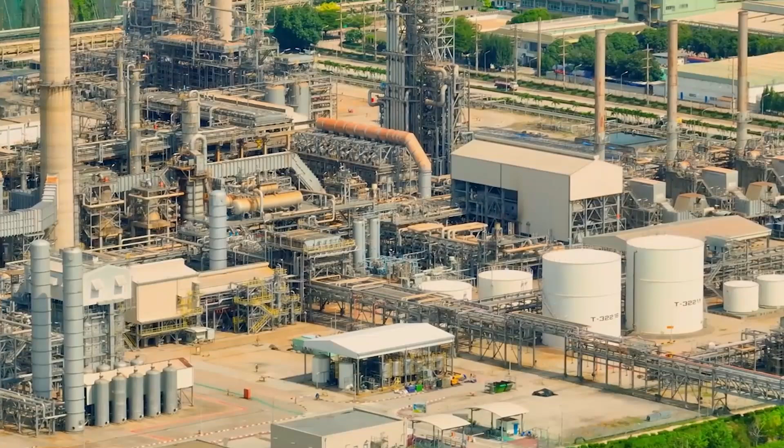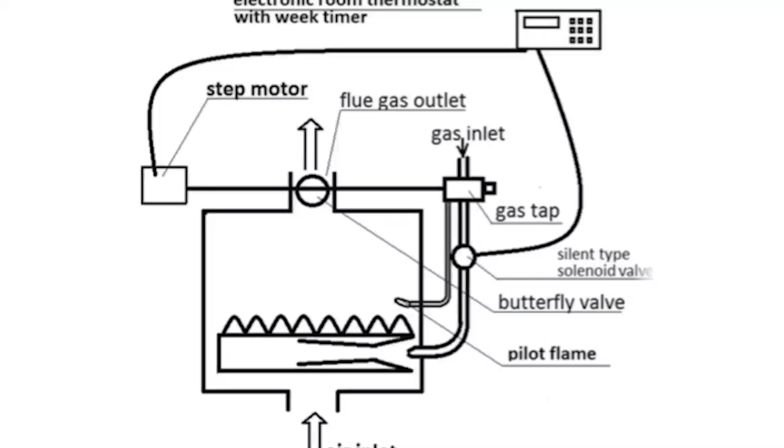And this is not a concept. This is not a prototype sitting in a laboratory waiting for funding. This has already been built thousands of times across thousands of years. In ancient Rome, engineers constructed thermal complexes the size of city blocks, structures that maintained precise interior temperatures using nothing but stone, airflow, and geometry. In the Persian Empire, architects designed buildings that stayed cool in deserts where temperatures exceeded 50 degrees Celsius. In ancient Greece, philosophers mapped the sun's path and oriented entire cities to harvest its energy deliberately.

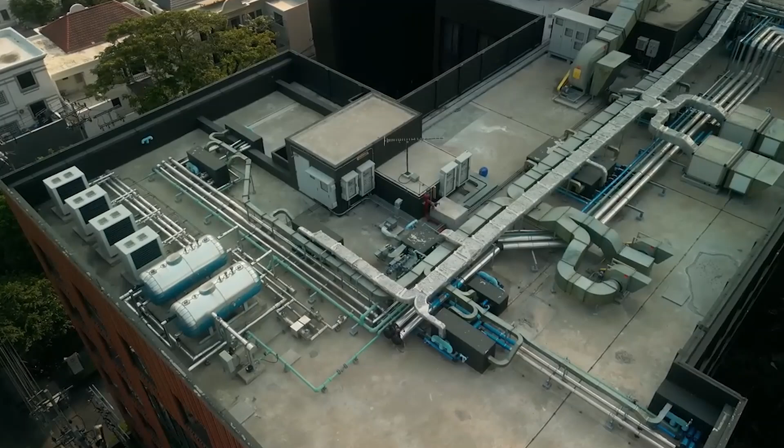Then in 1972, in the deserts of New Mexico, one architect rebuilt these principles from scratch and proved they still work. And yet, today, almost no standard home is built this way. That is not an accident. That is a decision. And behind that decision is a system worth hundreds of billions of dollars that depends entirely on one thing: that your home cannot heat itself.

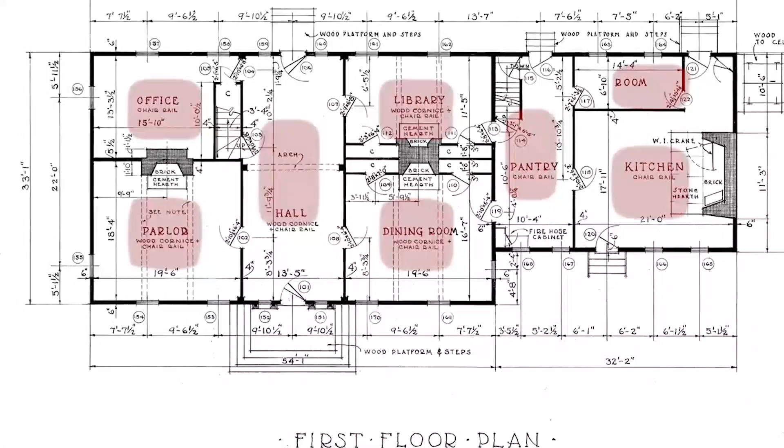This is what they buried, and this is how we dig it back up. Let us begin with what they do not teach in architecture school. Over 2,000 years ago, Roman engineers solved a problem that modern construction pretends is still unsolved.

They called it the hypocaustum, from the Latin meaning heated from below. And what they built was not a primitive fireplace. It was a fully engineered thermal distribution system embedded directly into the bones of a building. Here is how it worked.

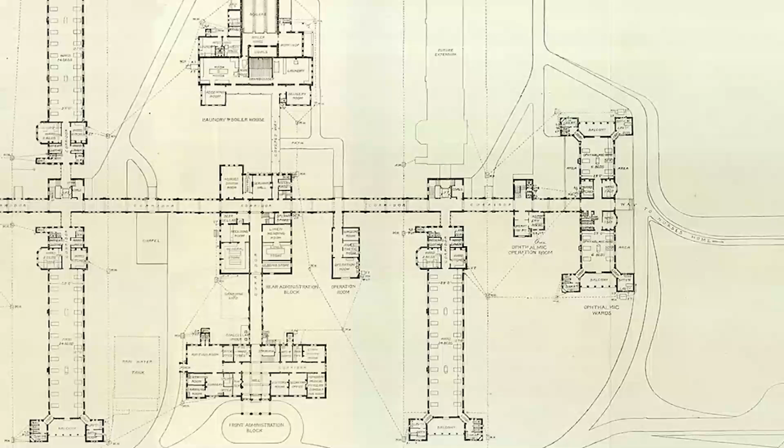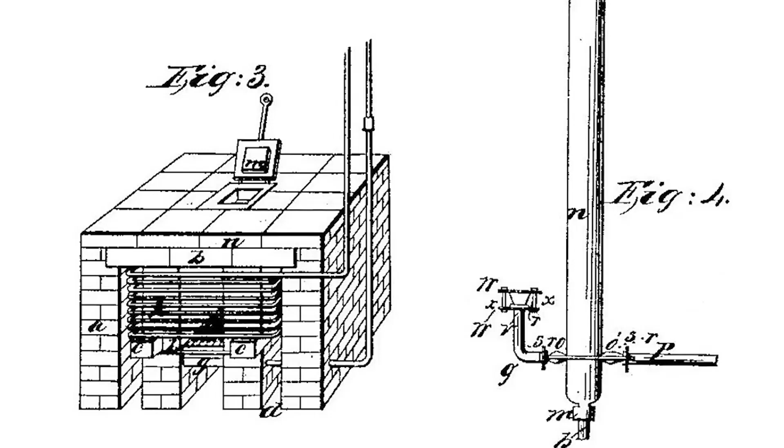The floor was raised on small brick columns called pilae, stacks of fired clay, precisely spaced, creating a hollow chamber beneath every room. A furnace, called a prefurnium, was positioned at the building's edge. Slaves fed it wood, but the fire itself never entered the living space. Instead, hot air traveled horizontally beneath the raised floor, moving through the chamber by convection, the natural tendency of warm air to spread into cooler spaces.

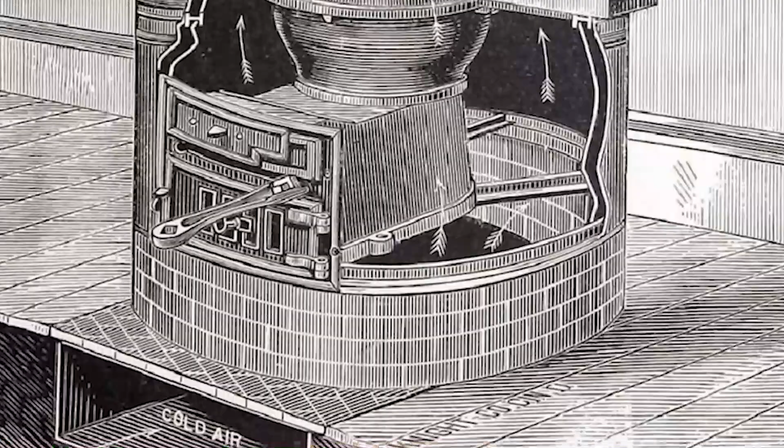It did not stop there. The walls were hollow. Ceramic box tiles called tubuli were built directly into the wall structure, creating vertical channels from floor to ceiling. The heat rose through these channels. The walls themselves became radiators. The entire building, floor, walls, and ceiling, was one unified thermal system.

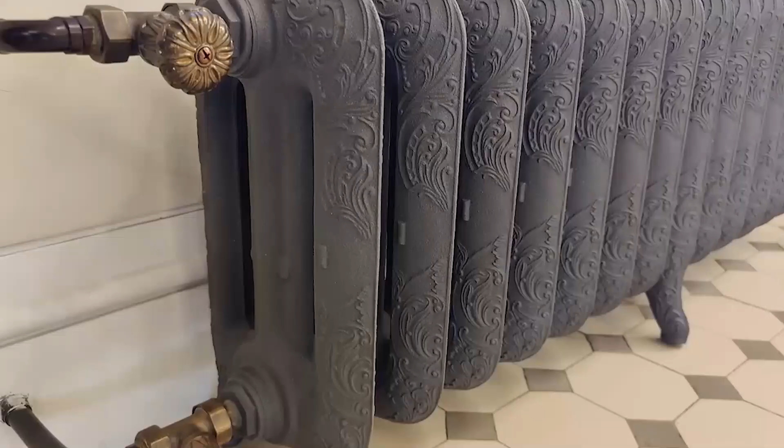The Baths of Caracalla in Rome, completed in 216 AD, used this system to heat a structure covering more than 11 hectares simultaneously, using a handful of furnaces positioned at calculated intervals.

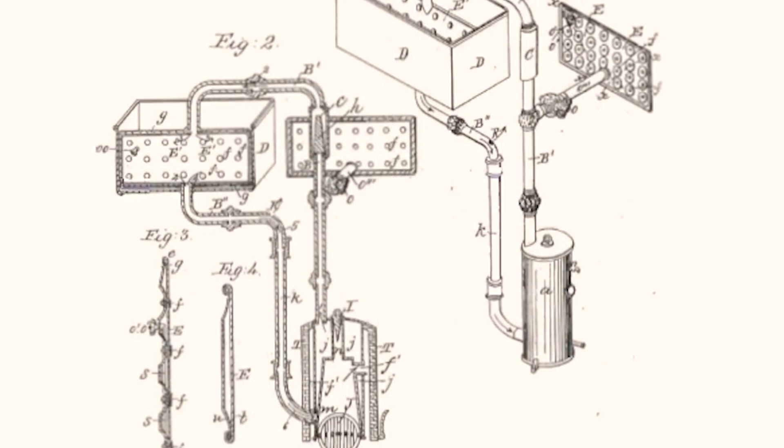And when the fires went out, the building did not go cold immediately. This is the part that matters. The stone retained the heat. Dense Roman concrete and brick absorbed thermal energy during the heating cycle and released it slowly for hours, sometimes days, after the fire was extinguished. The building itself was the battery. The architecture was the machine.

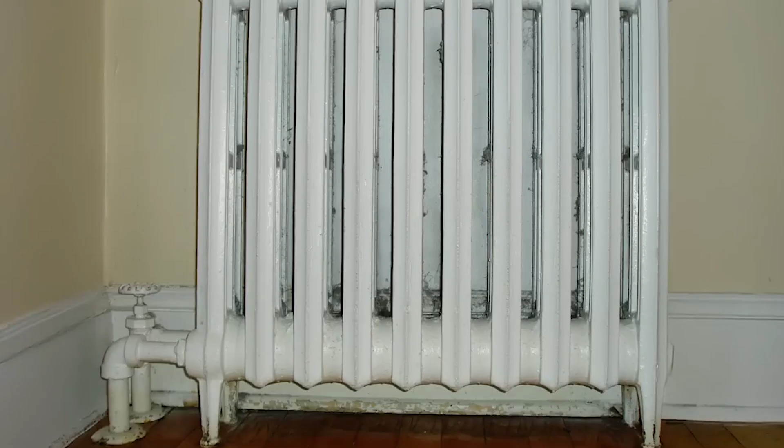Now travel east. In the Persian Empire, engineers faced the opposite problem: not cold, but catastrophic heat. And they solved it using the same foundational logic: use the building structure to control temperature, not a mechanical device added on top of it.

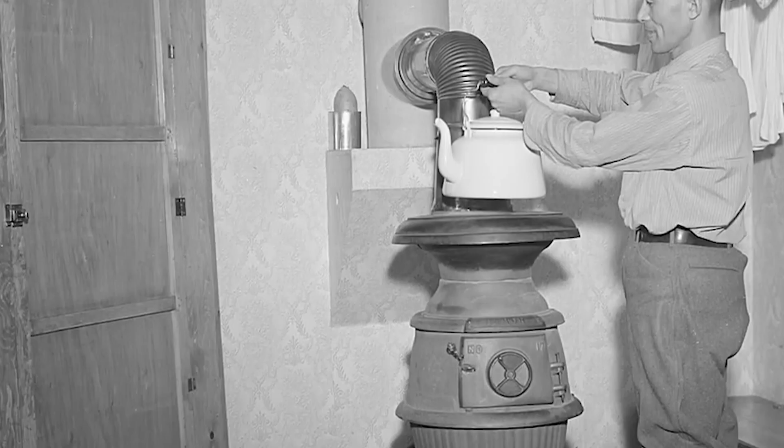They built badgirs, wind catchers, tower structures rising above the roofline, oriented precisely toward prevailing winds, channeling moving air down into the building's interior. Thick earthen walls, sometimes over a meter wide, absorbed daytime heat and released it slowly at night, stabilizing interior temperatures in climates where outdoor temperatures swung by 30 degrees Celsius between noon and midnight.

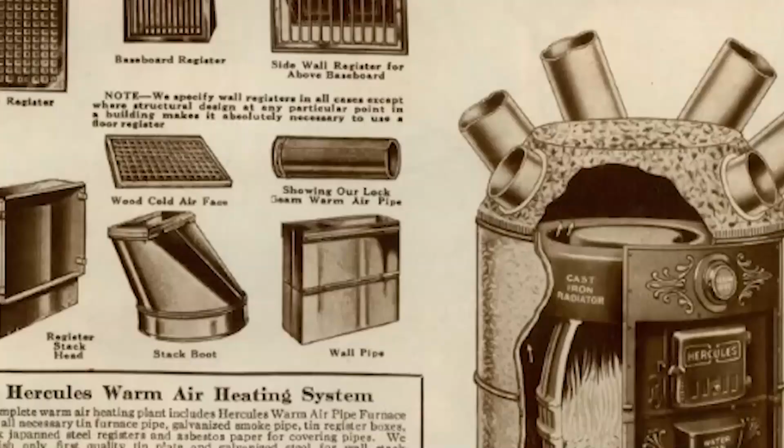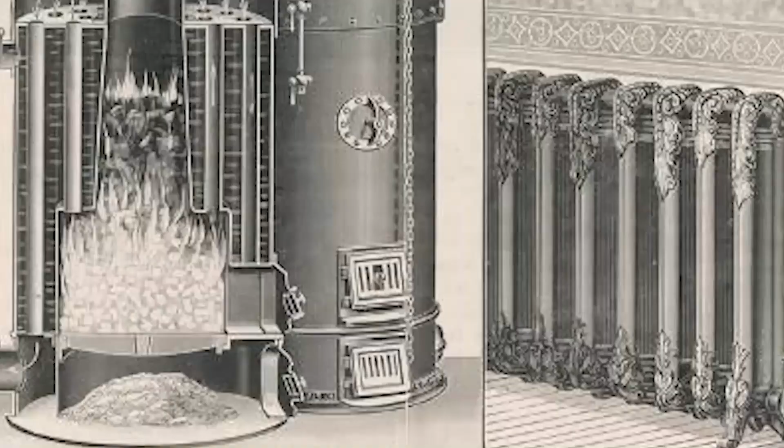Some structures used underground channels called qanats, water-carrying tunnels originally built for irrigation, to run cool air beneath the building before directing it upward through the living space. The result was evaporative cooling and thermal regulation achieved entirely through engineering without a single moving mechanical part.

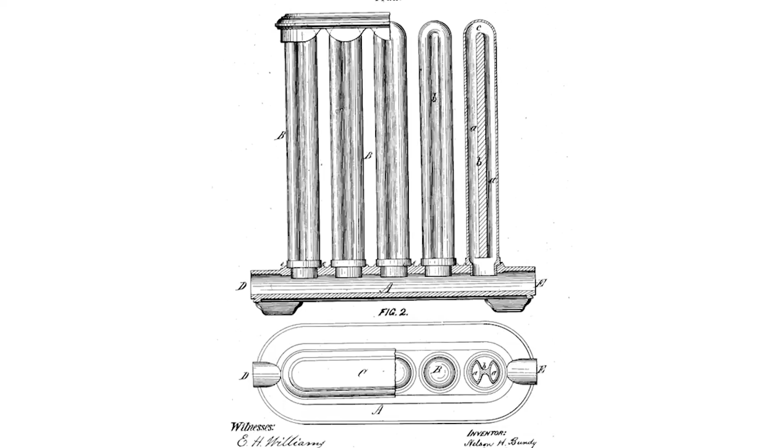In Yazd, Iran, buildings using badgir systems have been documented maintaining interior temperatures of 22 degrees Celsius when outdoor temperatures exceeded 45, with no electricity, no refrigerant, no compressor. The principle across all of these systems is identical.

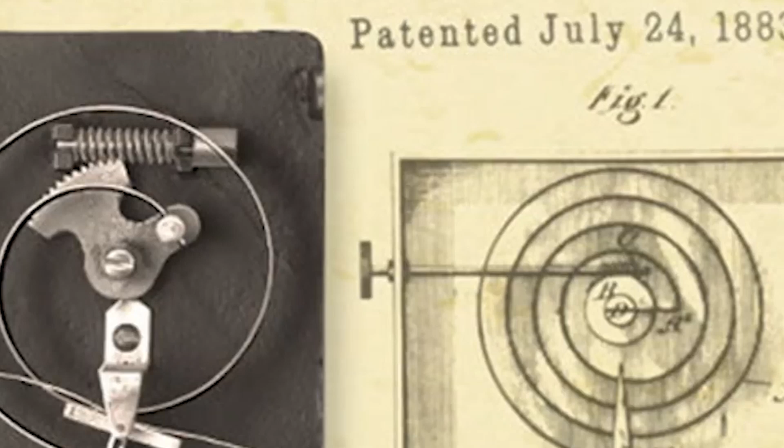Thermal mass absorbs and stores energy. Controlled airflow distributes it. Orientation determines how much solar energy enters and when. Dense material plus directional design plus physics equals a self-regulating interior climate.

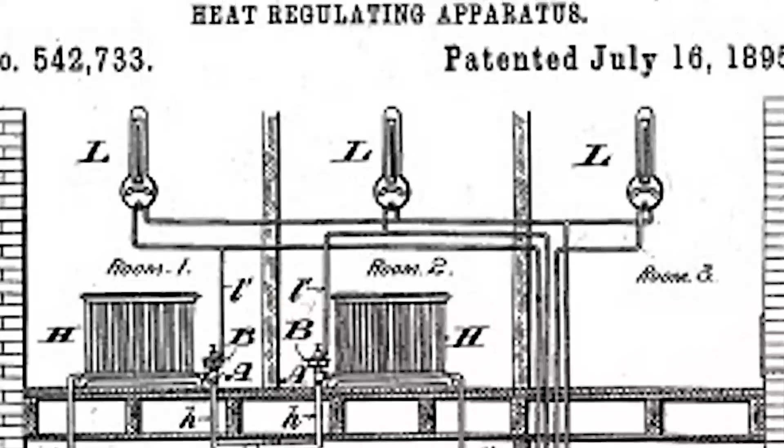This was not folk wisdom. This was engineering. Deliberate, calculated, and repeatable. And it worked so well that these buildings stood and functioned for centuries. Then the modern world arrived and decided to start over.

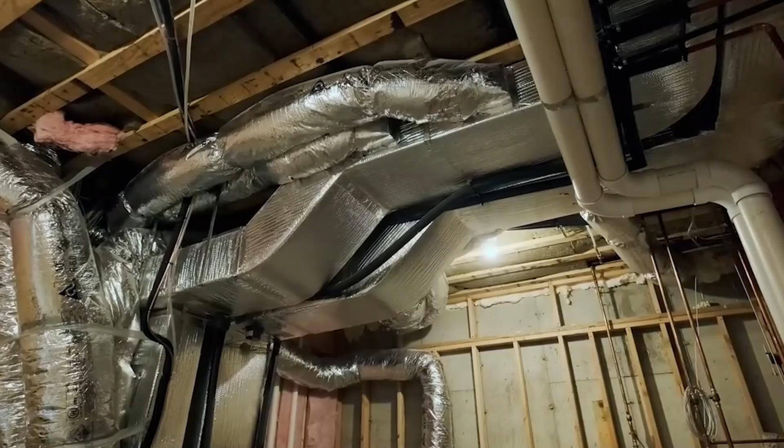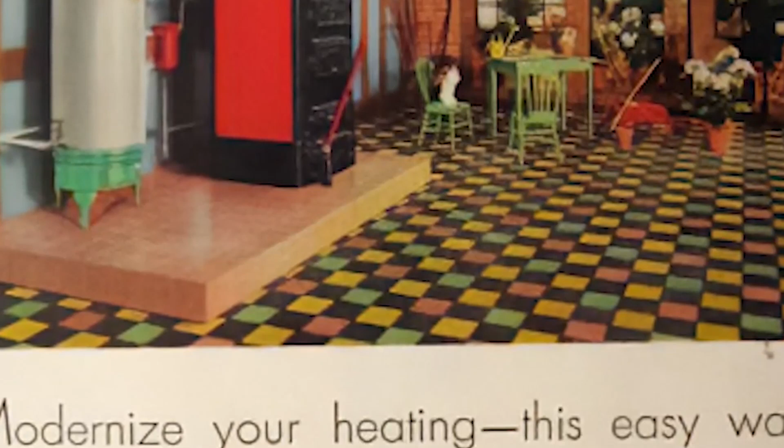The knowledge did not disappear overnight. It was buried under speed. After the Second World War, the industrialized world needed housing, millions of units built fast, built cheap, built now. There was no time to study solar angles, no budget allocated for thermal mass calculations, no incentive to orient a house toward the sun when a gas furnace could be dropped into any building, facing any direction, on any lot. Speed won. And in winning, it locked in a dependency that has persisted for 80 years.

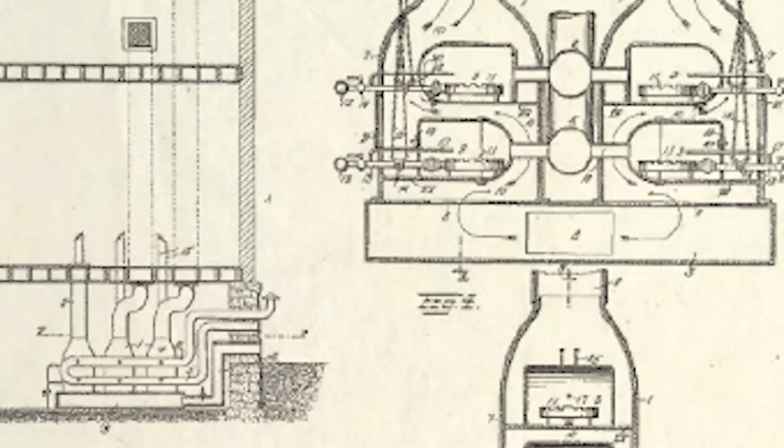But the engineers never fully forgot. In 1956, French engineer Félix Trombe, working at the National Center for Scientific Research in France, formalized what ancient builders had practiced instinctively. He designed what is now known as the Trombe wall, a system so mechanically simple that it is almost offensive in its elegance.

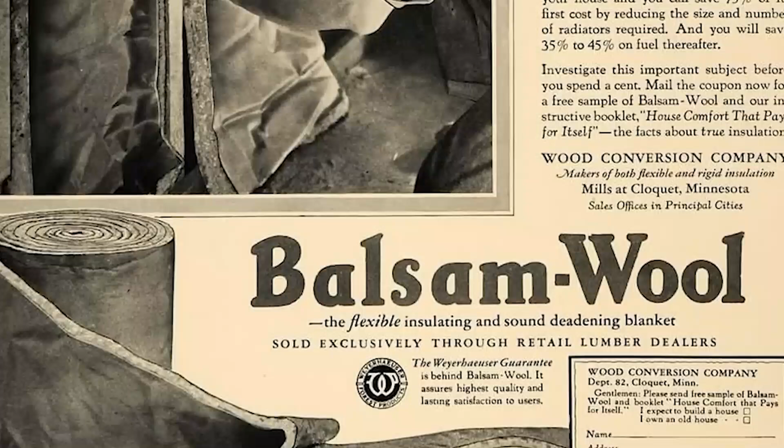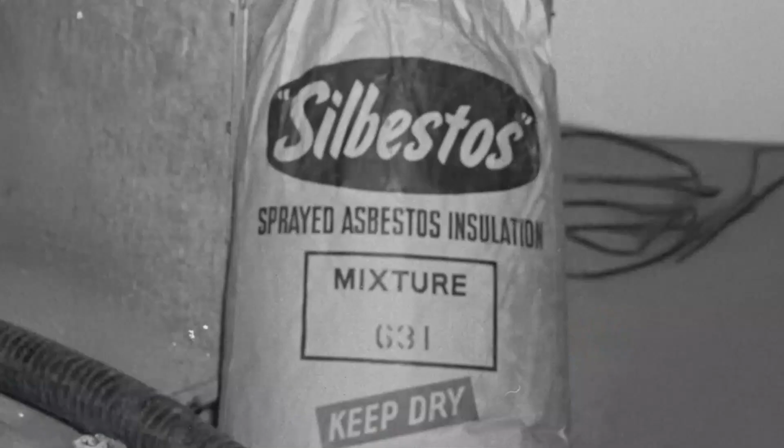Here is the construction. A thick masonry wall, typically stone, concrete, or adobe, is built facing the sun. In the northern hemisphere, that means south-facing. In front of that wall, separated by a narrow air gap of roughly 10 to 15 centimeters, a pane of glass is installed. Sunlight passes through the glass and strikes the dark masonry surface. The glass traps the resulting heat, the same greenhouse effect at work in every car on a summer day.

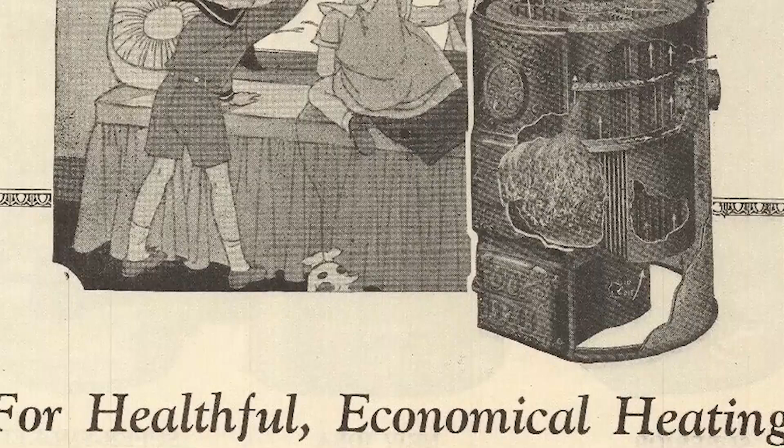The wall absorbs this energy throughout the day. At night, when outdoor temperatures fall, the wall begins to radiate that stored energy inward, slowly, steadily, for 8 to 12 hours after the sun has set. The wall is the furnace. There is no other furnace.

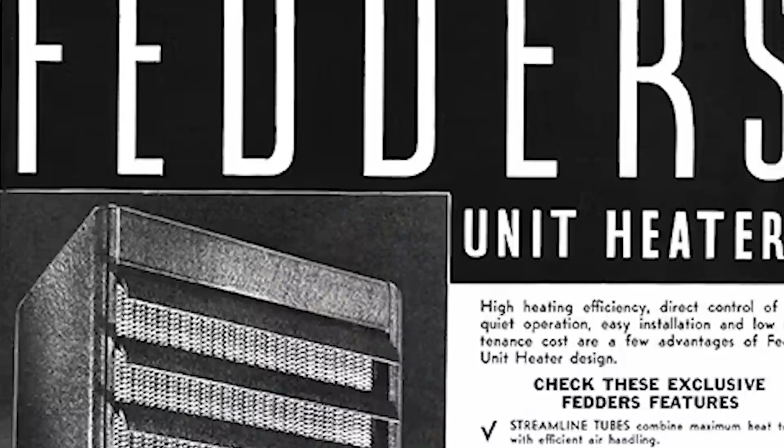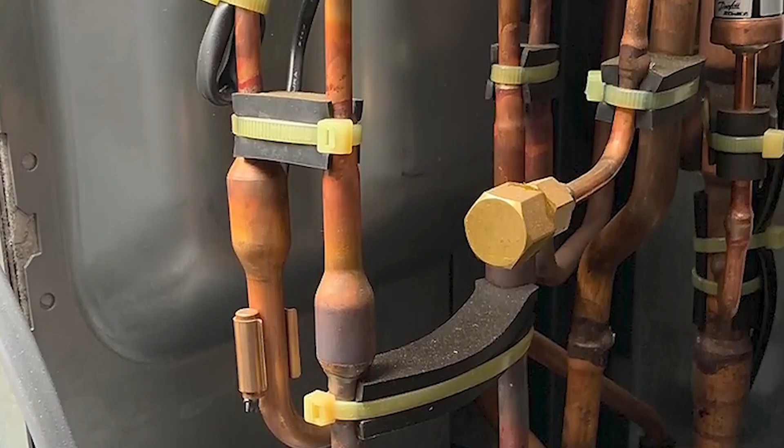Trombe demonstrated that a properly sized Trombe wall, roughly 0.3 meters thick, could reduce a building's heating load by 40 to 60% in a temperate climate, not 40 to 60% more efficient than an old furnace. 40 to 60% of the heating requirement eliminated entirely.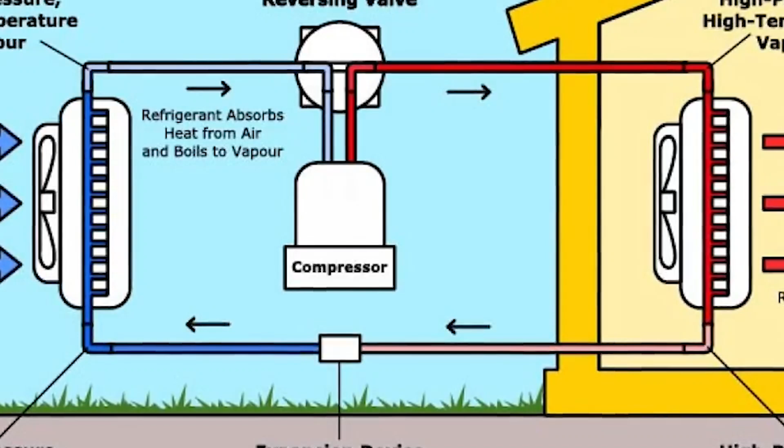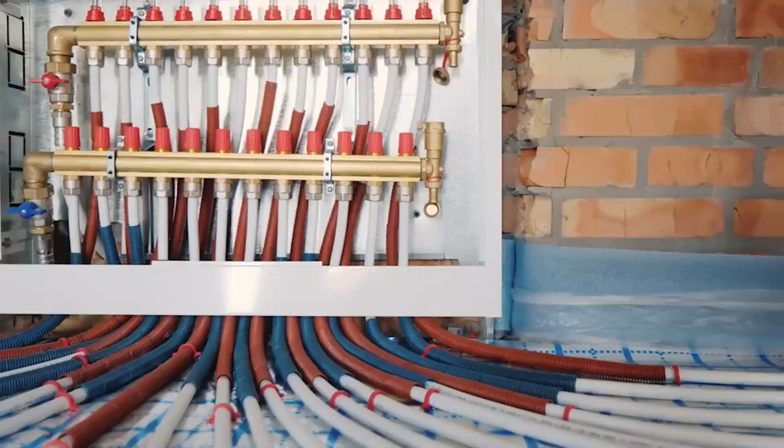Then came Mike Reynolds. In 1972, Reynolds, an American architect operating outside every conventional framework of his profession, began building what he called earthships in the high desert outside Taos, New Mexico. Elevation, over 2,000 meters. Temperature range, minus 20 Celsius in winter to over 35 in summer. Reynolds used walls packed with discarded automobile tires filled with rammed earth, thermal mass so dense and so cheap, it cost almost nothing.

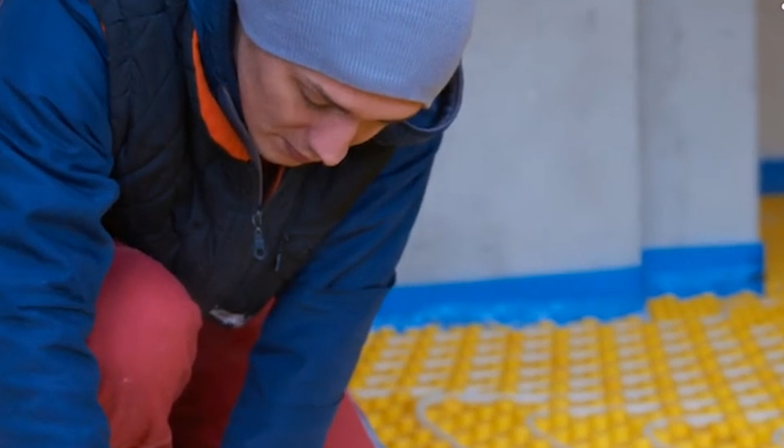He oriented every structure to maximize winter solar gain. He buried the north wall into the earth itself, using the ground's stable temperature of approximately 13 degrees Celsius as a thermal buffer. The documented results are not theoretical. Earthships in Taos maintain interior temperatures between 18 and 24 degrees Celsius throughout the year, with near zero mechanical heating or cooling input. Independent monitoring studies have recorded interior temperature stability during outdoor conditions ranging from minus 15 to plus 40 degrees Celsius. A structure made from old tires and earth, outperforming a modern HVAC system in one of the most thermally demanding environments in North America.

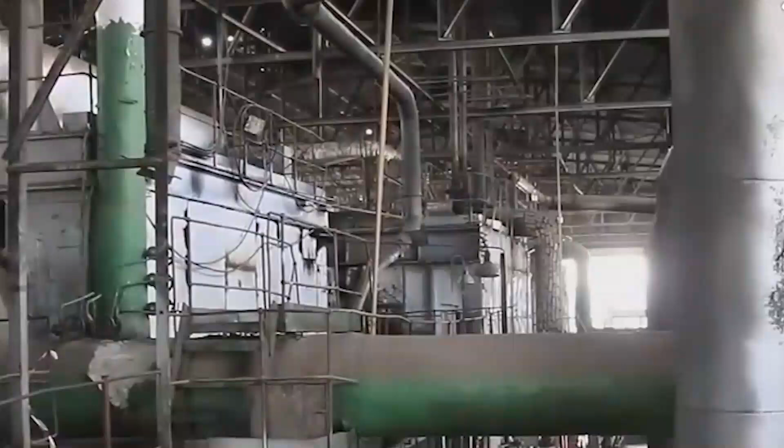In the 1990s, German physicist Wolfgang Feist took these principles and engineered them into a precise standard: the passive house. Feist's research institution documented that buildings constructed to this standard require up to 90% less heating energy than conventionally built structures of equivalent size. 90%. Not a marginal improvement, not a rounding error in efficiency calculations. A near total elimination of heating demand through architecture alone.

These are not fringe experiments. Passive House certification now exists in over 90 countries. Over 60,000 certified buildings have been constructed worldwide.

The science is not in question. It was never in question. So ask yourself the investigator's question. If the Romans mastered thermal engineering 2,000 years ago, if Felix Trombe proved it in the 1950s, if Mike Reynolds demonstrated it in the desert in 1972, if Wolfgang Feist quantified it down to the decimal point in the 1990s, why does the standard home built today in 2025 still depend on a gas furnace?

Follow the money. The global HVAC market, heating, ventilation, and air conditioning, was valued at approximately $240 billion in 2023. It is projected to exceed $360 billion by 2030.

That number does not exist if buildings heat themselves. A house that requires no furnace is a furnace that cannot be sold. A family that owes nothing for warmth is a family that cannot be metered. And a building stock designed around passive thermal principles is a customer base that has been permanently removed from the energy dependency system. This is not speculation, this is arithmetic.

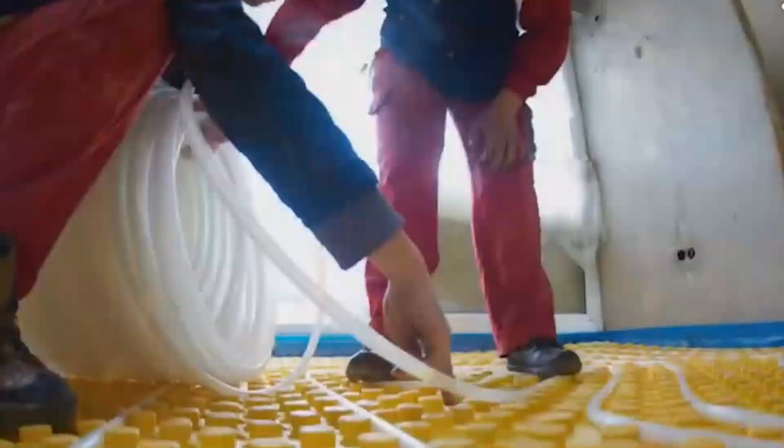Now examine the mechanisms. Building codes across the industrialized world were written and are continuously updated, with mechanical heating as a baseline assumption. The codes do not prohibit passive design. They do not need to. They require heating systems capable of maintaining interior temperatures to a specified minimum, and then they allow those systems to count toward compliance. Passive design must prove itself against a mechanical standard, written by committees in which HVAC industry representatives hold permanent seats.

The mortgage and insurance industries followed the same logic. A home without a conventional mechanical heating system was, and in many jurisdictions still is, classified as non-standard. Non-standard homes receive non-standard financing, higher rates, more difficult appraisals, reduced resale markets. You can build an earthship. You may struggle to get a mortgage on one.

Architectural education reinforced the pattern. Schools of architecture and engineering taught mechanical systems as the default. Passive design was categorized as a specialty, an elective, a track for the ideologically motivated, not a foundational competency for every practitioner.

Developers completed the cycle. Building at scale, subdivisions, apartment blocks, commercial towers, requires standardized methods that can be replicated by any contractor on any site with minimal site-specific engineering. Calculating solar angles, specifying thermal mass ratios, designing for a specific orientation on a specific lot. This requires time and expertise that mass construction timelines do not accommodate. Speed is cheaper than intelligence when someone else pays the heating bill.

The system around it made sure it would never fully succeed. A home that heats itself generates no invoices, it feeds no supply chains, it creates no dependency. And dependency is the foundation on which the modern energy economy is built.

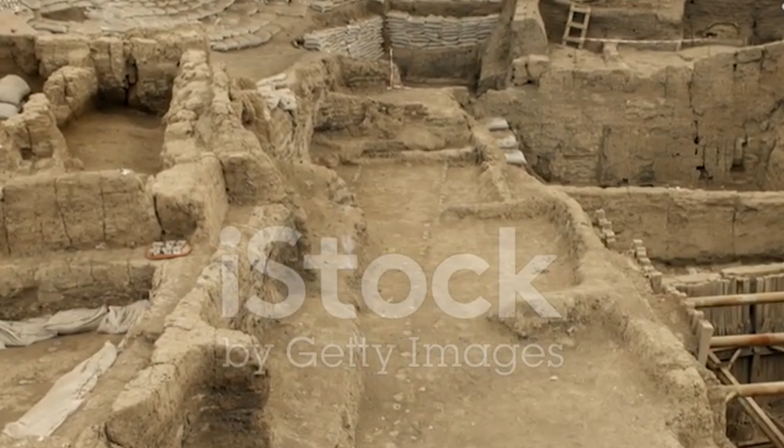But the physics cannot be repealed. And as energy costs rise, as climate pressures increase, and as the absurdity of heating poorly designed boxes with burning fuel becomes impossible to ignore, the old knowledge is returning. The only question remaining is whether we will choose to remember it, or wait until someone finds a way to sell it back to us.